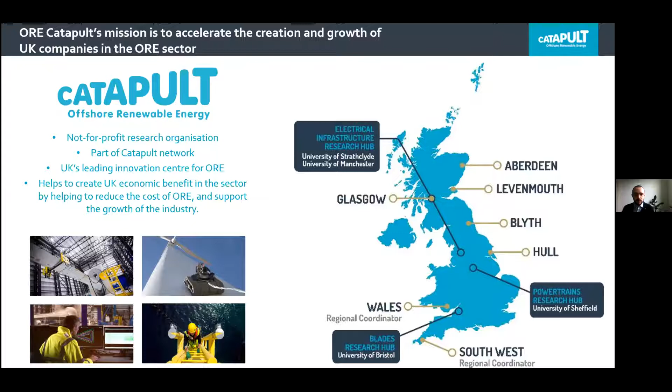So just a quick introduction to ORE Catapult. We are a not-for-profit research organization. We are part of the Catapult network, mostly located in Glasgow and Blyth, where we have our testing facilities. But at the moment we have numerous regional offices, including Southwest, Wales, Aberdeen, Hull, and East of England. We are there to help create UK economic benefit in this sector by helping to reduce the cost of offshore renewables and support the growth of the industry.

I guess a good starting point is a point on net zero. We, as UK, are legally obliged to reach net zero emissions by 2050, which is in less than 30 years. This means that all major emitting sectors, including travel, heating, manufacturing, power generation, and farming practices, will need to change radically during the next 30 years. Even with robust efficiency improvements, our electricity use will double or even quadruple. This will require major new policy reforms to drive both the supply and demand of low, zero, and negative carbon technologies. We may observe the installed capacity of offshore wind jumping from 12 gigawatts to 75 or even 100.

Hydrogen production, which at the moment is mostly from fossil fuels, will jump from around 27 to 370 terawatt hours. We'll need to decarbonize all of our transport and freight. The number of zero carbon cars will jump from 250,000 to 35 million. And it will also require some lifestyle changes, like changes to diet, where we'll need to cut our beef, lamb, and dairy consumption.

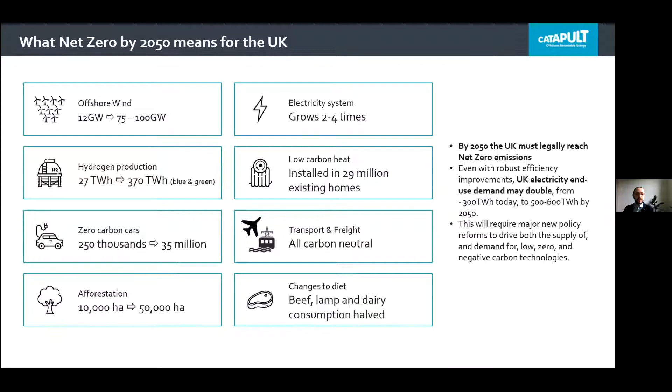There are key integration challenges to such a system, starting from the grid and grid design and flexibility. We have balancing for short time frames, which includes integrating variable energy sources into the electricity grid, which will probably be supported by demand response, utility scale batteries, and vehicle to grid. Balancing for long time frames, like interseasonal balancing, and decarbonization of heating, cargo transport, and the maritime sector. This will require some policy mandates and frameworks, like level of interconnection, role of hydrogen in energy trading, hydrogen safety regulations, and offshore wind deployment regulations.

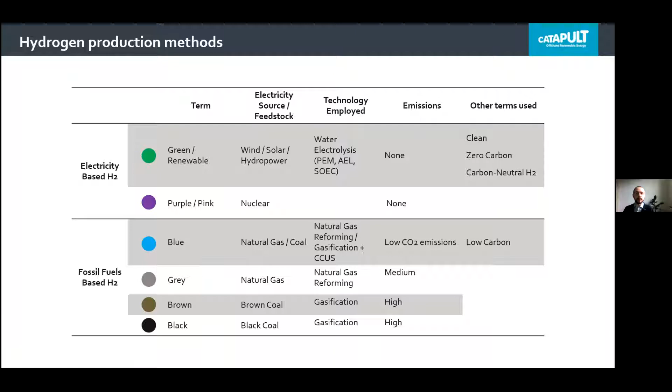Because hydrogen is considered such an important part of the energy system, we took a study together with the Offshore Wind Industry Council and delivered a report on offshore wind and hydrogen, solving the integration challenge. It's available publicly on ORE Catapult's website.

I think we released it in September, which makes it, at the time when we're writing, almost a year old. And in the hydrogen space, a year-old report is already quite old, because some of the findings might have been updated. Nevertheless, most of them are still in place. I'd like to present you some of the key findings from this report.

Starting from the energy system, we will require around 130 to 200 terawatt hours of hydrogen in 2050 in order to integrate 75 gigawatts of offshore wind or more. Second, and probably the most interesting, is that green hydrogen from offshore wind costs less than blue hydrogen by 2050. And with accelerated deployment, this cost can drop even further by 2030.

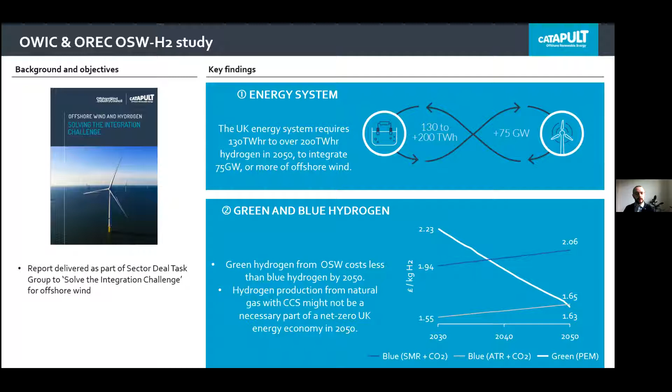This means that hydrogen production from natural gas with carbon capture and storage might not be a necessary part of a net zero UK energy economy in 2050. The cost reduction will be quite similar to what we've managed to achieve in offshore wind. So technology acceleration will be an essential means of reducing this cost.

We have a strong leadership in academia and the industry to build on. And the good part is that we've already done that before with offshore wind, so we can apply these lessons to just another sector. There are plenty of potential benefits. It's not only the UK that's looking into hydrogen. It's been a hot topic for the whole world.

We've tried to calculate these benefits, and we can have a cumulative GVA in 2050 of 320 billion, of which 250 is in exports. We can create and sustain 120,000 jobs. And there is an additional potential in green hydrogen exports to Europe, using up to 240 gigawatts of dedicated offshore wind.

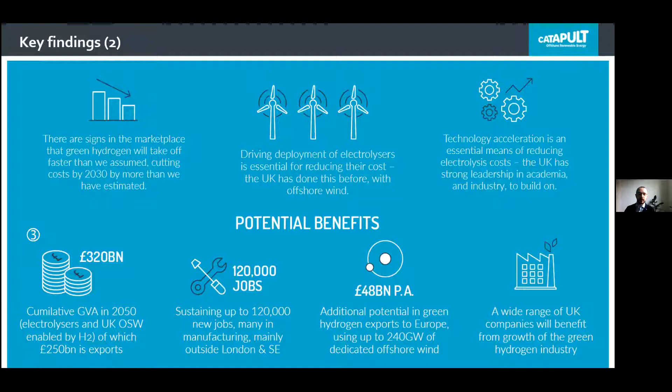Building a bit more into the cost reduction, modern PEM electrolyzers are a new industry with a significant scope for cost reduction. The research started in around the 70s, and the first commercial product at more than 1 megawatt scale was released in 2015. Until very recently, every unit was hand-built.

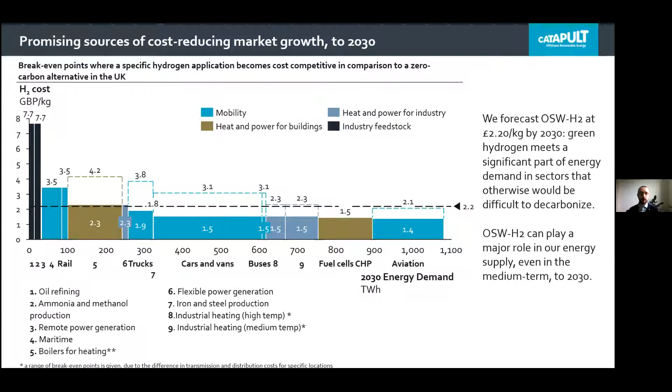So we're not talking about a technology that will be necessary in 20, 30 years. We really need to start now. That's why we've developed a roadmap with recommendations to the government. It has 3 essential tracks. The first is an R&D program, which, in particular the elements related to the cell stack component, will draw upon our world-leading capabilities that already exist within UK academia.

The second track is a track of demonstrations at scale, including demonstration projects in production, in mobility, in the gas network, and industry, and the set of enabling actions and policies, which make up track 3.

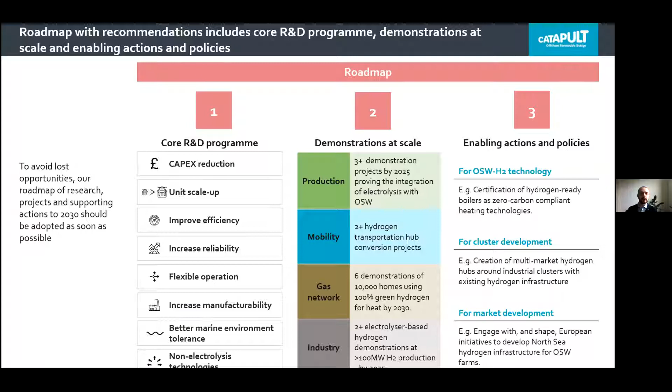As I've mentioned before, the UK is not the only country looking into hydrogen. Several other countries announced their strategies over the past 3 years, including the EU last year. We know that there are some in preparation, including ours, and hopefully the hydrogen strategy for the UK will be published in the first half of this year.

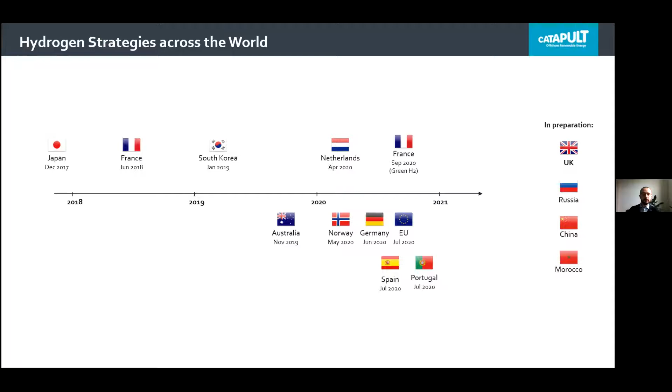So to leave you with a bit of thinking, I've tried to compile some of the questions on hydrogen, starting with what's the role of hydrogen in the UK? How much do we need it and at which point? Where should it be used? There are so many applications, but will we really need it for personal cars, for example? How much carbon could we save? What are the energy system implications? At which specific points can the UK take a global leadership position? And what existing assets can we leverage?

Obviously, in order to achieve that, we need to figure out what we need to do now. What are the barriers? How do we reduce the cost? What is the role of the government? How do we encourage coordination across sectors, particularly in regions that have a focus on oil and gas? How do we ensure we have the right skills, and what infrastructure will we need?

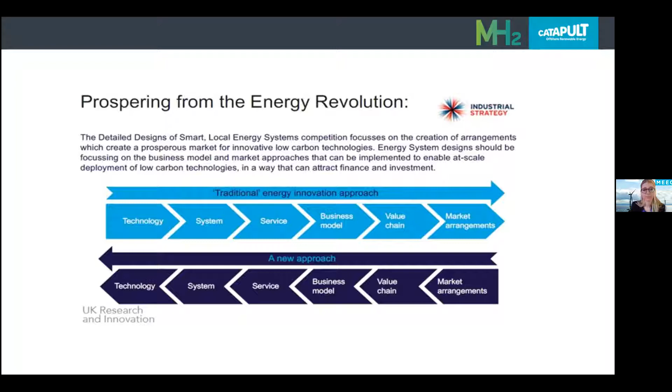So why did we pick the Milford Haven waterway? The Port of Milford Haven is a leading UK port handling over 30 million tonnes of cargo annually. It is also known as the UK's largest energy port and is capable of delivering 30% of the UK's natural gas demand. It has also got 17-metre depth of water available at all states of the tide and the ability to handle vessels with drafts up to 22 metres. It also has proximity to the Atlantic trade routes and a high capacity for gas and oil pipelines and electricity connections to the centre of the UK.

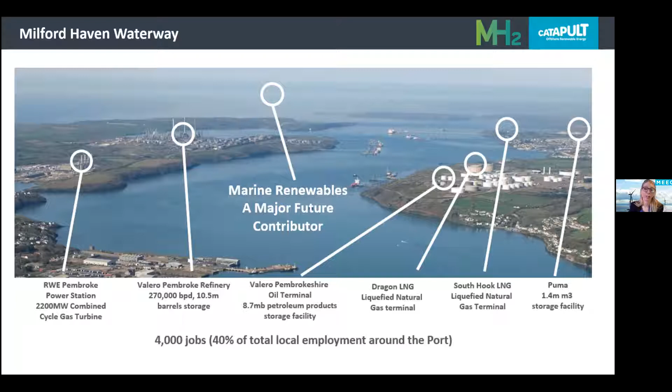The project has 5 main partners, so Pembrokeshire County Council as the lead partner, the Port of Milford Haven, Riversimple, Wales and West Utilities and ourselves. We're being supported by Arup and Energy Systems Catapult as subcontractors, and then we have various non-funded collaborators and supporters.

A national transition from natural gas to hydrogen is increasingly seen as a likely component of full decarbonisation by 2050. When the Energy Kingdom project was written, we wrote the objective as to establish seed markets for the use of hydrogen around the Milford Haven waterway by integrating a wide range of major energy facilities, renewable energy generators and energy consumers in the community, using a systems architecture that can be implemented with commercial ready solutions and which focuses on underlying fundamentals and is therefore robust in the face of regulatory change.

Our ambition for the project is to gather a detailed insight to the whole energy system around the Milford Haven area. We want to identify and design a future smart local energy system based on a truly multi-vector approach and a comprehensive energy systems architecture.

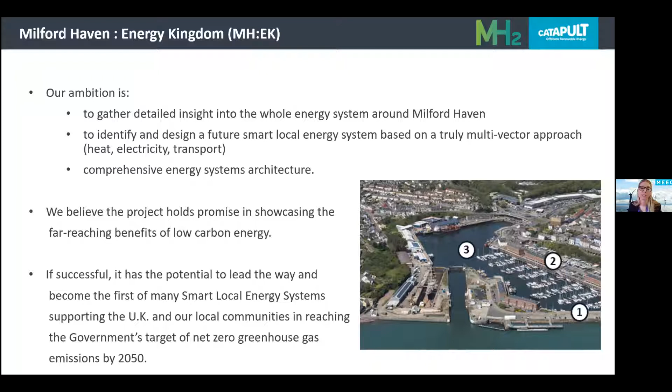We believe this exciting project holds promise in showcasing the far-reaching benefits of low-carbon energy. If successful, it has potential to lead the way and become the first of many smart local energy systems supporting the UK and our local communities in reaching the government's targets of net zero greenhouse gas emissions by 2050.

In the project, we have 11 work packages. Energy Systems Catapult are developing our systems architecture design. Arup is currently working on understanding the interplay of the local energy assets in the Milford Haven area, engaging with a range of local stakeholders as part of this exercise, both to introduce the Milford Haven Energy Kingdom project and to begin to draw on information required to support the project.

Pembrokeshire County Council and Riversimple are developing the hydrogen transport demonstrator. The Port of Milford Haven and Wales and West Utilities are developing the hybrid heating trial. We also are looking at finance and investment. So we're concentrating on engaging investors and demonstrating an economic and sustainable investment case for the decarbonised multi-vector energy system.

We're going to be doing lots of stakeholder engagement. We're going to engage with stakeholders and explain potential environmental, economic, well-being, energy security and particular benefits for the decarbonised multi-vector energy system. The stakeholder engagement will draw strongly on the vehicle and hydrogen heating demonstrators, which will support awareness raising and education by demonstrating how hydrogen can be integrated into the local Milford Haven area. I'm just going to quickly show you a short video about the project.

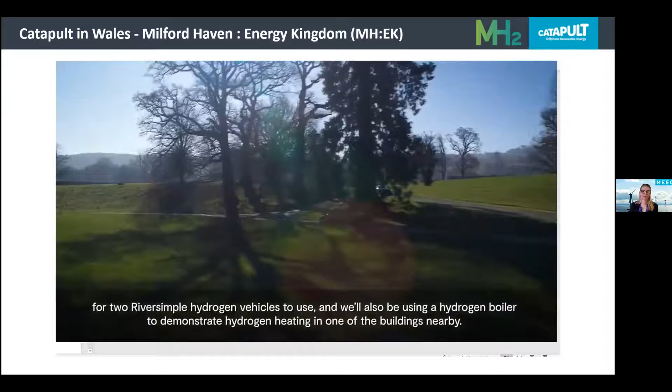The project's taken steps to prove that hydrogen has a place here in the UK's largest energy port. That's important because it ensures growth, prosperity, keeping jobs and industry alive here, and making most of the transferable skills from a successful existing energy sector. In order to make sure we have the data that we need for our design, we're really pleased to be hosting a few demonstrators, which includes just behind me on the quay an electrolyser producing green hydrogen from local electricity for 2 Riversimple hydrogen vehicles to use. And we'll also be using a hydrogen boiler to demonstrate hydrogen heating in one of the buildings nearby.

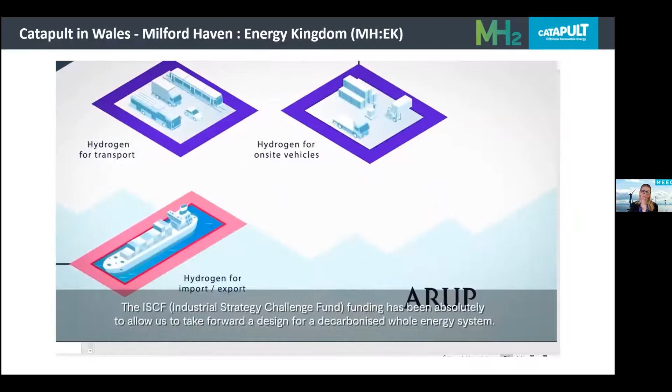The project has the potential to become the first of many smart local energy systems and seeks to make a strong business case for investment in hydrogen to the government and engage key stakeholders in the waterway. The ISCF funding has been absolutely critical to allow us to take forward a design for a decarbonised whole energy system. Ultimately, our project aims to benefit the wider South Wales region and the UK's national net zero aspirations.

So as the video showed, we're proposing to site our hydrogen refueler demonstration on Mackerel Quay in Milford Haven. We will be electrolysing green hydrogen on site from the Port of Milford Haven's Smart Local Energy Cluster. If everything goes to plan, the refueler and cars should be in place by the end of May 2021. That's a bit delayed. We were hoping to have them by the end of March, but due to COVID, it's just taking that little bit longer.

So we're going to have 2 Riversimple Rasa cars, which will predominantly be shared between Pembrokeshire County Council, the NHS and the Port of Milford Haven. In the first instance, these cars are going to be allocated to particular people for a month. For example, community nurses, fleet managers, maintenance teams. The idea of this is that the month before they have the Rasa car, we're going to put a monitoring device on the car that they normally use. We can then measure their driving styles, the routes they take, other relevant information to learn all about them and what they do with their vehicle.

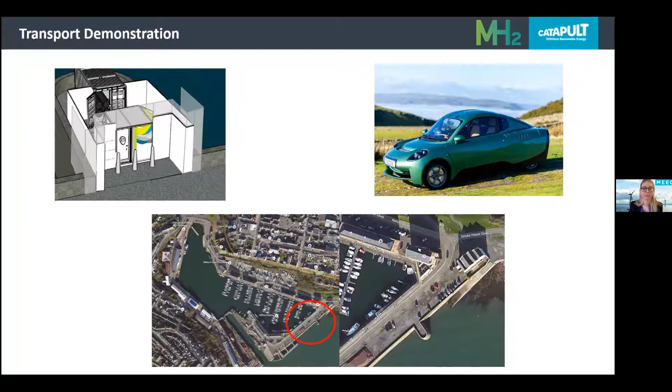We're also having a demonstrator hybrid heat pump and a hydrogen ready boiler in one of Port of Milford Haven's buildings. The building we've chosen is a commercial building, but it's the same size as a domestic bungalow. So it'll help us gain vital feedback to compare the data with existing conventional boilers. These trials are really important as they will allow people to test real-world hydrogen vehicles and heating equipment, and the data from both these trials are going to feed into our final reports.

Some of the reports that we're going to be having after this project will be designing an underlying systems architecture for a trading platform, infrastructure outline drawings, generation model and hydrogen production model. We're looking for a detailed design for hydrogen ready heating systems, a design outline drawing for transport solutions, and also a budget for the complete local energy system.

The Milford Haven Energy Kingdom project intends to provide a detailed design blueprint for an investable local hydrogen-based energy system on the Milford Haven waterway that will allow for the integration of heat, power and transport. We want to establish a roadmap from the Energy Kingdom perspective of policy change necessary to support the energy system that incorporates hydrogen. We believe that this project will bring many benefits locally through the safeguarding of energy sector jobs in the area where there's a high import of natural gas as we transition towards the low carbon society.

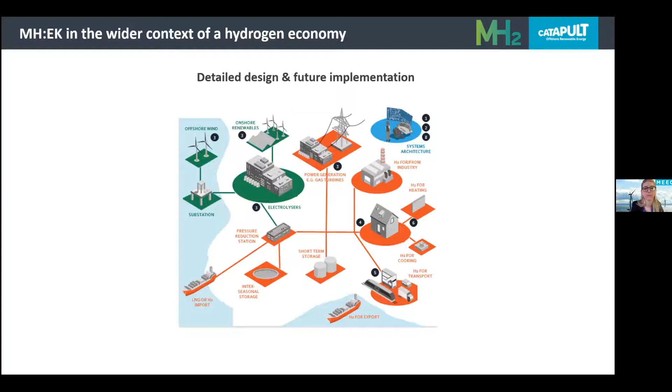I'm just going to give you a quick introduction now to the MEECE project I work on. So that's the Marine Energy Engineering Centre of Excellence. This is based in Wales and it was developed to carry out research and development projects with companies in the West Wales and the Valleys region predominantly. Our aim is to support innovation in the marine energy sector, but not exclusively. So we can work with companies to support designing of products and components, building, testing, verification and validation.

Our natural target is the marine energy supply chain companies and developers, but we're also looking to work with people in aquaculture, hydrogen and any other product or service that would benefit from being demonstrated in the Milford Haven waterway. So if you're not based in Wales or in West Wales and the Valleys, we can work with you as long as we can prove that there's a benefit of your device being tested in the Milford Haven area. So if you do have any product ideas or products that could benefit from further research or testing, please get in touch.

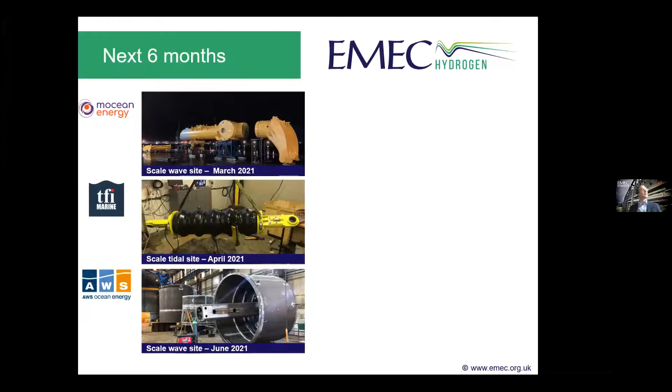So just briefly, what we're up to over the next 6 months or so, we've got a few technologies. There wasn't a lot of activity on sites last year due to COVID. And I think what we found is everything is kind of moving to the right into the first half of this year. So we've got 2 wave energy technologies, Mocean and AWS, who will be coming on site in March and June this year. We're also testing a floating wind mooring system, which is being developed by TFI Marine.

And then towards the middle of the summer, or the start of the summer, we'll have Orbital and Magallanes, 2 floating tidal energy technology developers, coming on site and connecting at our Fall of Warness test site. And then lastly, to cap off a busy 6 months, we're installing a 1.8 megawatt hour flow cell battery with Invinity on our tidal energy test site.

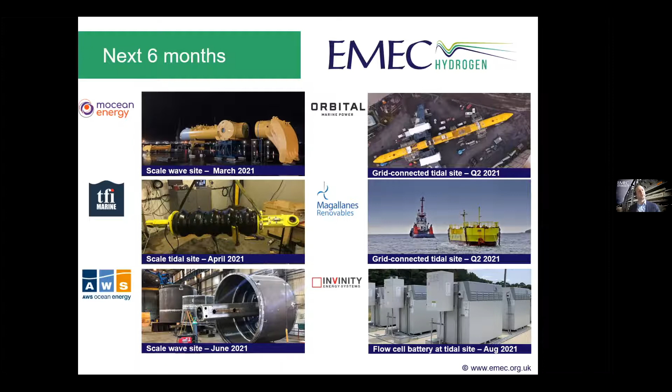Okay, so then on to the hydrogen bit. So we started looking at this in about 2014, and due to the quite unique situation in Orkney, Orkney produces about 130% of its electricity requirements from renewables each year. So there's a question as to what you do with that extra electricity. And quite a bit of the time, because of the active network management system that operates in Orkney, wind generators in particular are being curtailed, and when they're being told to turn off by the network operator, they're not making any money.

So that's an issue. It's also an issue on our tidal site, where we only have 4 megawatts of export capacity. So when we want to generate more than that 4 megawatts, we wanted to have some kind of an outlet for doing that. So in 2014, we started looking at a lot of different solutions. Further graph here as well, just highlighting the disparity in electricity production and demand on Orkney. So as you can see, quite a lot of renewable energy on the grid. So we started looking essentially at what we can do with this spare capacity rather than just turning off wind turbines or tidal turbines, as the case may be.

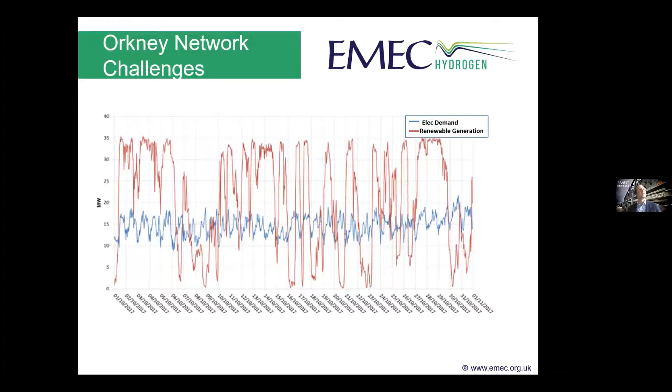And this took us down the route of looking at hydrogen in about 2015, and subsequently we built out a number of projects. These are the base projects that we started off at EMEC on the production of hydrogen. I don't know if you can see my cursor, but starting up on the top left-hand side of this map here on the island of Eday, this is where our tidal energy site is. So we have tidal turbines feeding electricity into the substation here. We also have a partnership with a community-owned wind turbine, which is experiencing very high curtailment rates. So we're taking electrons from the wind turbine and also from the tidal turbines and generating hydrogen using a 500 kilowatt ITM electrolyzer on site here.

So producing hydrogen, then that gets compressed and stored at our substation and shipped via ferry back to the mainland, where we have a 75 kilowatt fuel cell, which is powering the auxiliary systems on ships while they're docked in harbour here. We also have a hydrogen refueling station as well, which refuels a fleet of vans owned by the local council. In parallel, there's also a 1 megawatt electrolyzer on this island here of Shapinsay, which is also generating hydrogen from a curtailed wind turbine and shipping the hydrogen back to shore.

The long-term goal really where we want to get with this is around powering the ferries and maritime transport on Orkney. We kind of had to break this up into different parts. And with all of the moving around of hydrogen in this way, it's not a commercially competitive concept at present, but as a research center, it gives us the opportunity to break up the challenge into different bits around how you regulate the transport of hydrogen, the handling of the gas, and lots of interesting stuff that we've had the opportunity to get into.

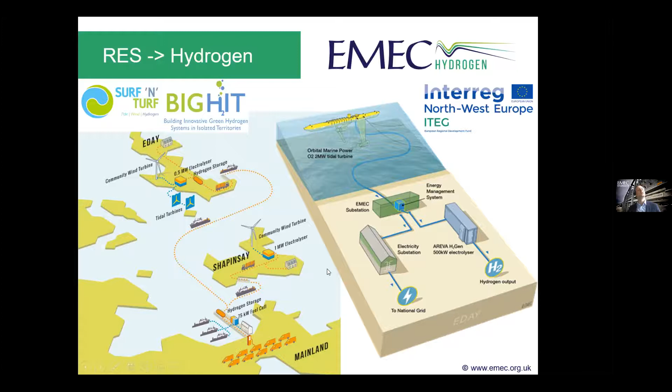The next project then on the generation side is on the right-hand side of this picture here, where we're working with Orbital Marine Power and our partners at Areva, who were recently acquired by GTT and have changed their name to Elogen, I think. So they'll be putting a second electrolyzer on site into this system at Eday later this year. So that's on the generation side and where we got to. And just to go into that in a little bit more detail, the system that's emerging here on the hydrogen side.

Okay, so I guess then you come to the point where we've made hydrogen and there's opportunities to do something with that hydrogen. As a research center, this is a really nice place to be in. We've kind of come down this route where we've had a challenge in front of us and we've tackled it, but then that opens up other opportunities as well.

So taking a look at this is an audit of what energy is used in Orkney, and considering that the electricity piece is kind of looking after itself, and as we've seen from Casper's slides as well, the proliferation of offshore wind across the UK, it's really going to mean that we're going to have quite a low carbon per kilowatt in the future. So given that that's largely to look after itself, then what can we do with the hydrogen to decarbonize other aspects of the economy?

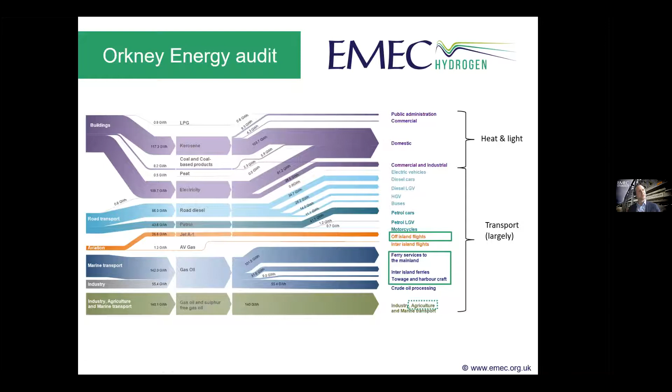We've done quite a bit of work, I'll get to that in a second, around how you produce hydrogen on site, store it, but then the handling of the gas and also the dispensing of the gas, and a lot in how the refueling technologies work in particular. And then also looking at developing hydrogen use cases to support other decarbonizing activities. So, as I mentioned, the transport aspect is really where we're zeroing in, and in particular on the maritime transport aspect and aviation.

We've learned a lot, particularly in the maritime space, running into, as you would in new sectors, difficulties around regulation and standards essentially not being fit for purpose because no one's done it before. And that's really, as a research organization, a nice position for us to be in, to be the front ones that are tackling that challenge.

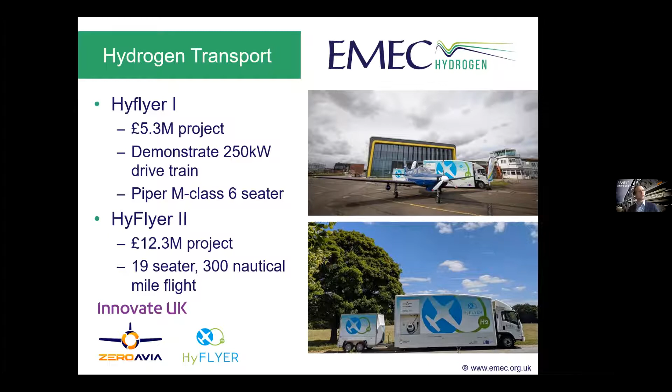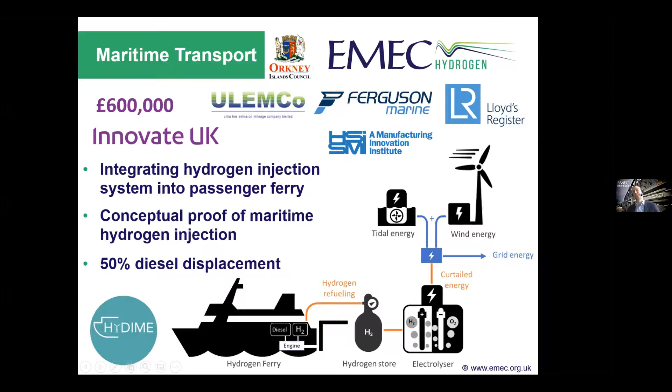We also have another maritime project, which is called HySeas 3, which is looking at a fully hydrogen electric drivetrain for a ferry as well in Orkney. And then moving on to using hydrogen for combined heat and power as well. This is a project that was announced recently, funded by the Scottish Government, where we're acquiring a combined heat and power system from 2G, a Doosan Babcock company, and installing that in Kirkwall Airport in Orkney.

And this will be providing power and heat into Kirkwall Airport, and we'll be providing hydrogen to that project as well. So EMEC taking a leading role, somewhat of an EPC role, I suppose, in managing the design and integration of that system, but then also operating it and providing the hydrogen into it in the longer term.

One other project that we're working on is the HySpirits 2 project. So we were recently awarded some funding from BEIS as part of their green distillery competition to look at how you would decarbonize the distilling process for making whiskey and gin. So phase 1 is a feasibility study. There's us and maybe 10 other companies that have been awarded phase 1 awards, and then 2 or 3 of these will be selected to go forward for demonstration projects this summer. And our partners in that are Edinburgh Napier University, Orkney Distilling and Highland Park.

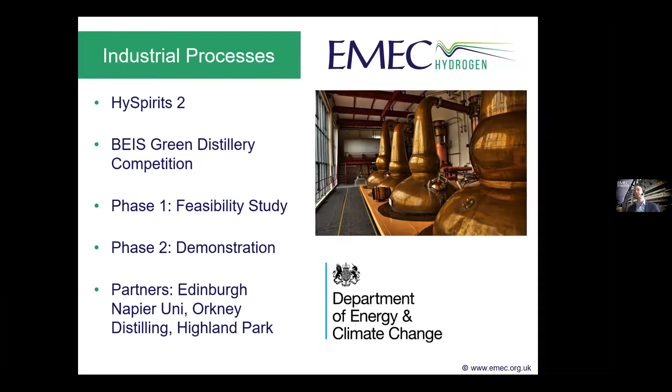Okay, so that's some of the hydrogen projects that we have ongoing at the moment in Orkney. There's a few other bits that I haven't gone into. And really then we've had the opportunity to work with other partners in Europe via a few other projects called Green Hysland, Islander, and the HEAVENN project in the Netherlands. And really these are looking at replicating some of the successes that we've had in Orkney in developing a hydrogen economy and taking that forward.

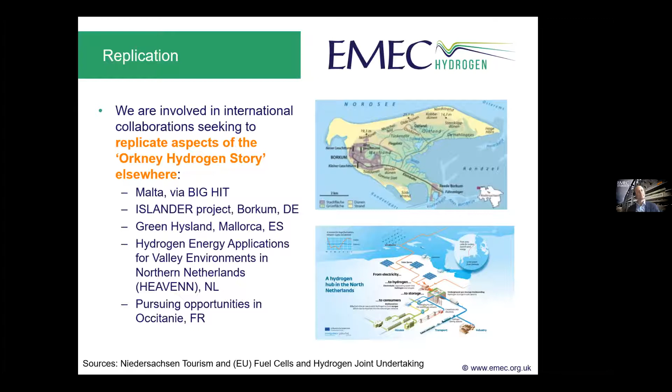Right. And then just lastly to mention, we're also involved in a couple of projects providing techno-economic support around generating hydrogen offshore. We're seeing a lot of interest in this. Our core client base really is power generating technologies. And we've been working with a couple of technology developers to look at this, both from a techno-economic standpoint, but also from the regulatory standpoint and what issues people are likely to encounter. We've also recently been awarded a contract with the Scottish Government to look at offshore wind to hydrogen and the supply chains for that existing in Scotland and in France. So that project's ongoing at the moment.

And where we want to get to then in 2024 is really zeroing in on the maritime decarbonisation aspect. There's also a larger piece ongoing here around the ScotWind leasing rounds and potentially a huge amount of offshore wind to be built out around the Orkney Islands in the coming period, which is really alluding back to some of the really great messaging coming from Caspar and the Catapult earlier.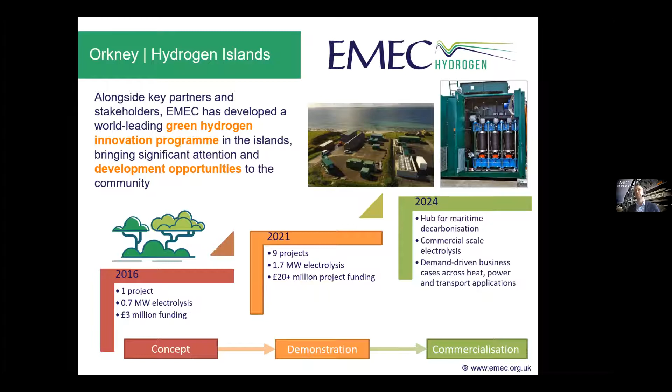And that's the end of my presentation. I was worried I had one more slide because I know we're coming up against the time, but that's back over to you, Simon. Thanks very much, Rob.

That's brilliant. So much going on the island. Do you think there's going to be a name change coming up then? So maybe European Hydrogen Energy Centre? Oh, I was thinking the same thing when the Catapult was talking about the Hydrogen Institute earlier. Yeah, it is something that we've discussed. I guess EMEC's a small organization in a small space, which is marine energy. So it's quite a strong brand there. We did wonder what the hydrogen sector thinks about that name, but I think the conclusion we came to is that it probably largely doesn't matter in the longer term. So. Yeah.

It's a sort of serious question for me. Just looking at Michelle's presentation about Energy Kingdom and what you're doing from an island community perspective and a great business model that you're starting to replicate elsewhere.

Is there a conversation going on between ourselves around Energy Kingdom and what you're doing? Are we starting to compare notes? If we're not, should we? I'm not sure we are, and we absolutely should be. I mean, what we're trying to do in the island context is very different to what would happen in the very large scale context that you would be talking about in the port of Milford Haven with the large gas production or gas facilities that are there.

But there's definitely a similar piece that could emerge in Orkney in the future, particularly with the build out of very large offshore wind projects. So I think there's a lot that we can learn in Orkney from the Haven project, or the project in the port of Milford Haven as well. Okay, great. A couple of questions in the chat. One was about the population of Orkney and that hydrogen service, and whether there's any scale up plans for the future.

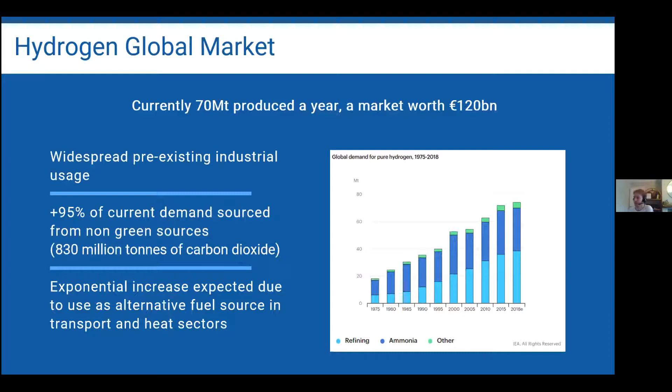And as today is all about, we're now starting to see an exponential increase in alternative uses for this hydrogen, which is only going to push that demand higher and higher in the coming years. So it really wraps up into a ball why we've targeted the hydrogen market with THyPSO. Just to cover a few of the goals. So THyPSO allows us to tackle some of the conventional challenges with tidal energy, which at the moment are high capex and high implementation costs, especially as we're at a smaller scale than wind, and we're at a point where we're doing small arrays or demonstrator projects.

It also offers an opportunity to tackle cross-sector synergistic challenges, helping the uptake of hydrogen, especially in the marine or nearshore sectors. And we believe it offers a lower cost, lower risk, potentially faster route to market for some tidal energy projects, which I'll cover in more detail in a few slides.

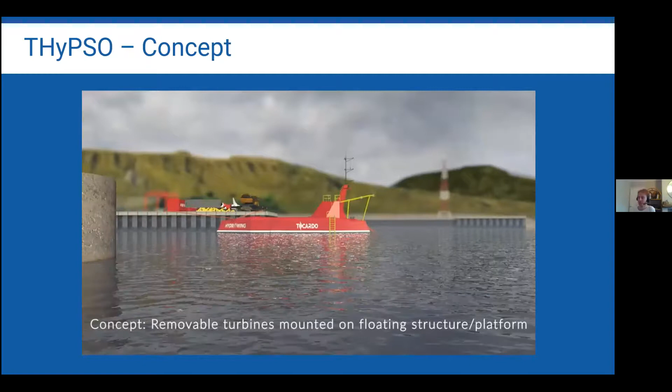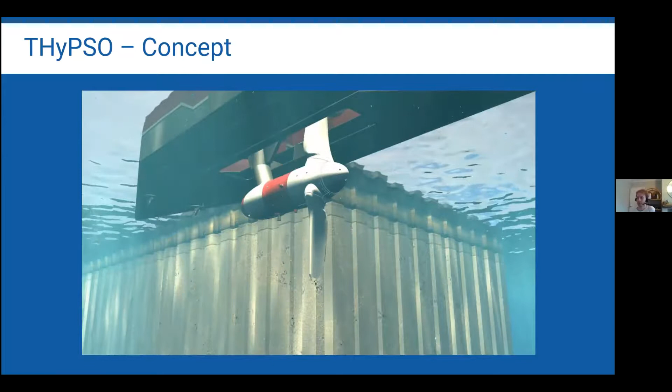I'll just let this play, give a background on what the actual technology is. Hopefully you can see that moving. Essentially what we've got is a vessel which has been optimized for stability and wave penetration. On this vessel we'll then have multiple tidal turbines underslung, and then inside the vessel is hydrogen equipment, your desalination plants and your electrolyzers and storage units.

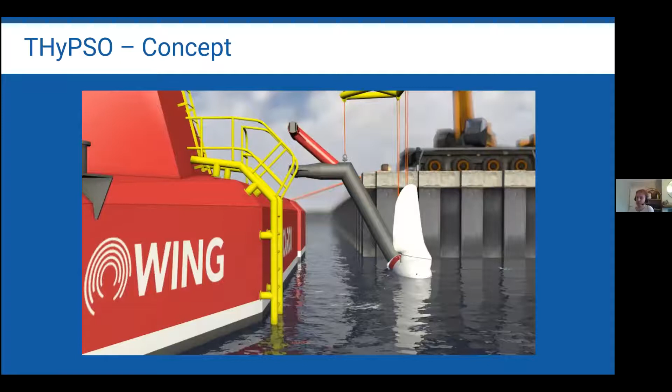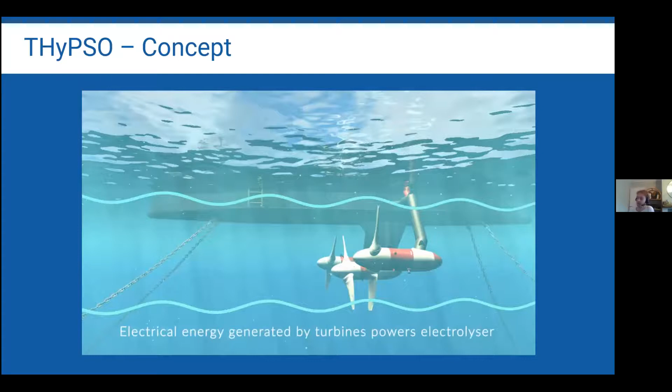The whole concept is that we're creating a platform which is easy to install using low cost equipment in harbors, but also low cost vessels for installation and O&M as well, which are readily available, really trying to drive down that cost of tidal and ultimately hydrogen. The device will be moored on site with just a simple 4-point mooring, and then your turbines just generate electricity as you would in a normal tidal energy project.

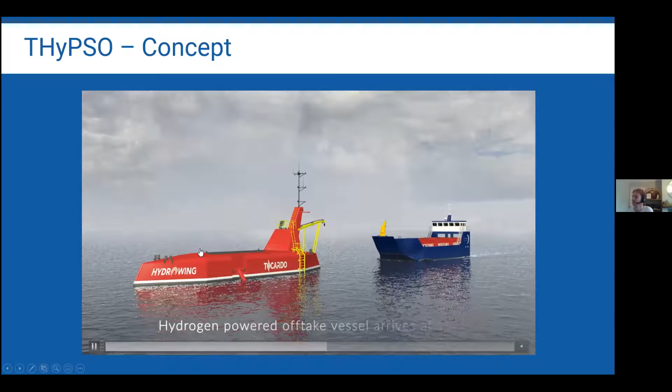But then rather than the electricity being exported through a subsea cable, it's directed into an electrolyzer on board, produces hydrogen, which is compressed and then stored. I'll just let this carry on running. And then when storage builds up, we look to have an offtake vessel come in, and the hydrogen from the production plant will be discharged over onto the offtake vessel.

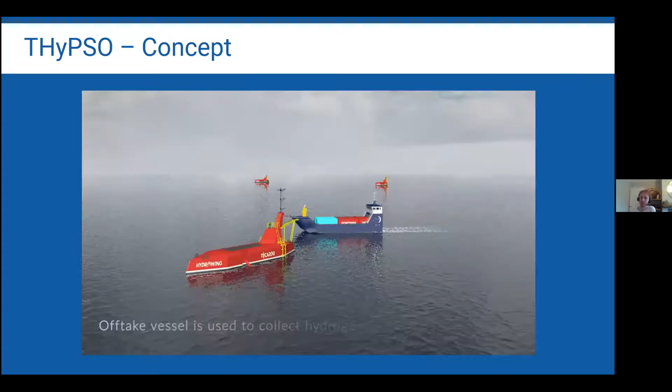This offtake vessel can then service a number of THyPSO devices, and then the hydrogen can be distributed to wherever it's needed on shore. And the beauty of this is that we're disconnected from a single point of delivery. So in theory, these small islands like the Orkney Islands, where there's a number of end users, we can provide hydrogen to all of these smaller end users.

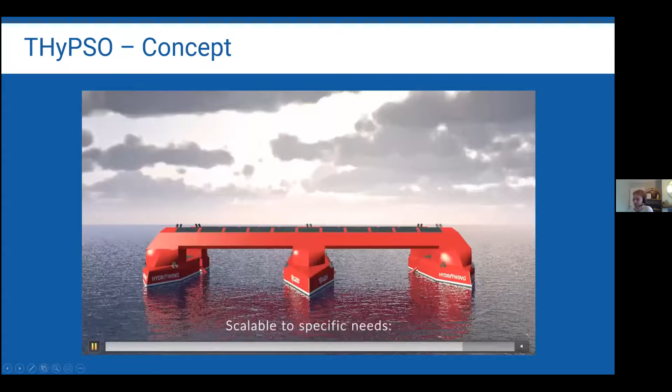And obviously, a key aspect of this is scaling up. So this is just showing how we envision that could be possible. Larger units and the potential to hook in subsea tidal energy devices as well.

Okay, just to cover a few of the advantages of THyPSO, I won't run over all of these, but the major one we see is that we're eliminating subsea infrastructure. So all of your tidal energy projects to date require a subsea cable. By having hydrogen production offshore, we're able to eliminate that. And these cables and the implementation of them account for around 40 to 60% of implementation costs for tidal energy projects where we are at the moment in terms of scale.

It also is a massive point of risk in tidal energy projects and offshore wind. It's a well-known failure risk. So by eliminating all of that structure, we've essentially got a dumb floating vessel, and the risk of failure is massively reduced, which provides certainty as we look to raise investment or finance for implementing these projects.

Another important point, as I've touched on, is that we're autonomous from a grid. So we don't have that cable which is connecting us to a single point of delivery. We can produce hydrogen and distribute it to many end users, which is really quite an important fact, I think, at this point, especially in the hydrogen sector where it stands at the moment, where we don't have these big centralized end users. There's lots of little developing projects which are looking to utilize hydrogen, and THyPSO and maritime distribution offers potential to service and to allow these small projects to spring up and develop.

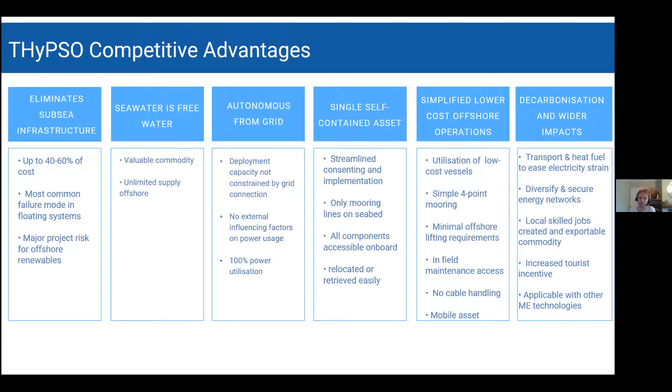So just to run over what we've got in the actual THyPSO, just to make it a bit clearer. So we've got our tidal turbines, as I said. We then look to have the electrolyzer, and a key point of development here is that it would have to be marinized, which is something which we're looking to develop alongside a number of electrolyzer developers at the moment. We then have seawater, which would be our feedstock, and a desalination plant on board, which would provide a freshwater feedstock to the electrolyzer.

Obviously, we would produce hydrogen as the tides go back and forth, and then this would be compressed to 350 or 700 bar, or even potentially liquefy the hydrogen as we look to much larger scales in the future.

And then, yes, a separate vessel which would offtake this and provide it to our end user markets, which I think aligns quite nicely with what's been covered in the previous presentations. We would be looking to target the marine and nearshore sectors. So just four of them, the main sectors: offshore applications.

So in theory, there is potential, as we're seeing the marine sector starting to look to hydrogen as a potential fuel, to have vessels which could directly refuel offshore from these THyPSO-style devices or bunkered hydrogen storage.

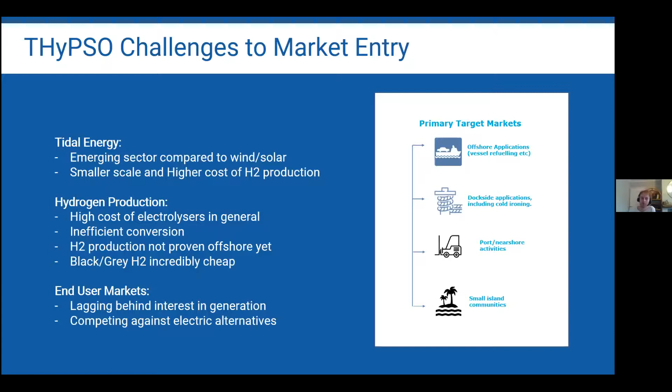And I think a major advantage for an area like the Channel is that it has struggled to implement large-scale offshore wind projects like those seen on the east coast of the UK, whereas tidal is found in regions which are highly dynamic and generally avoided by marine traffic, and they have a much higher public acceptance than these large offshore wind farms. So it offers more of a niche opportunity to harness these renewable resources and provide distributed hydrogen to these areas.

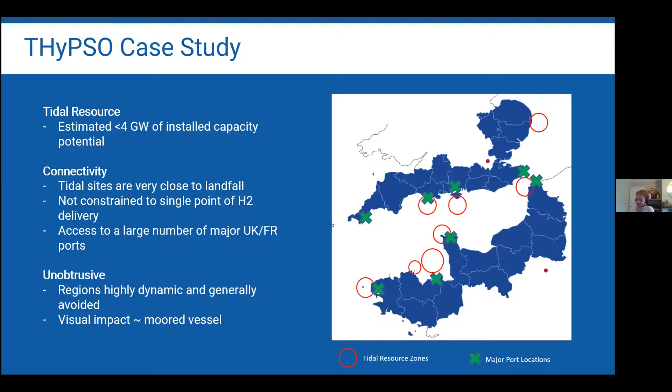Really good stuff there. I think from my point of view, from an engineering perspective, when you look at THyPSO, you think, yeah, actually, it looks like it can do that. It's a straightforward, simple design, and you think, yeah, that's actually quite a good idea. And I suppose that issue around tidal predictability is a really important one. We know exactly when the tides are going to flow, down to the nearest minute almost

in most sites. But from a hydrogen production perspective, putting that cyclic energy into an electrolyzer, how does that work? Do you have to manage that energy and perhaps create some energy storage first so the electrolyzer works efficiently?

Yeah, exactly. I mean, it's all an optimization technique, really. Obviously, the more capacity of electrolyzer you've got, the price tends to go up. So if you can optimize that with storage and you can create a nice flat base load of energy, then you can bring down the cost of that electrolyzer whilst making it more efficient and producing hydrogen at a more constant rate, to really drive down the costs there. And tidal integrates nicely with energy storage to create that nice flat baseload power almost.

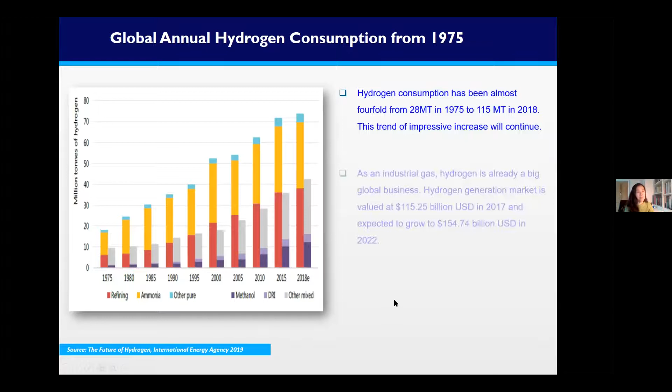The bar to the right represents hydrogen application without purification, for example, for methanol production and for metal refinery application. We can see here the hydrogen consumption has increased fourfold from 28 million tons in 1975 to 115 million tons in 2018, of which 70 million tons is for hydrogen application in pure form, while 45 million tons is for application without purification. We can see the increase is really remarkable, and the trend will continue.

In the financial aspect, the hydrogen market is huge. It was valued at $115 billion in 2017. So this just gives you a general idea about the hydrogen consumption and demand. It's really high.

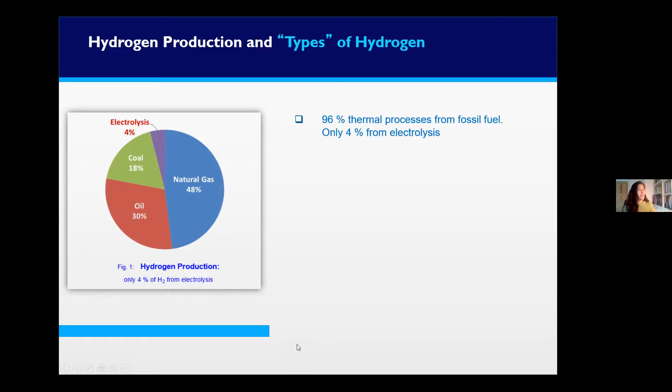Nowadays, as shown in Kaspar's presentation, people talk about hydrogen in different colors. And here, I just show you the pie chart. You can see, basically, we label hydrogen with 3 colors. Black or gray hydrogen refers to hydrogen production from fossil fuel. As shown in this pie chart, 96% of hydrogen currently comes from fossil fuel.

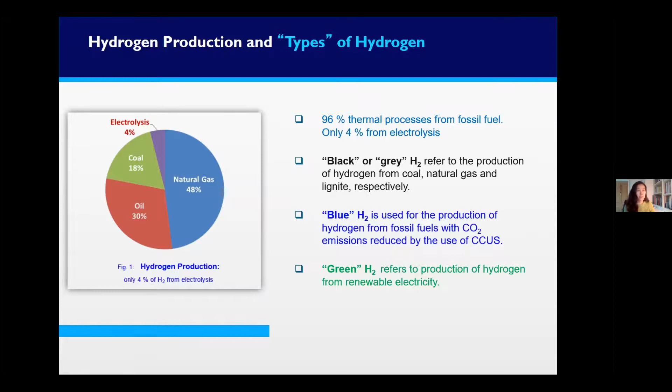Only 4% is from electrolysis. Blue hydrogen refers to hydrogen from fossil fuel in combination with CCUS, which means emitted CO2 can be captured, utilized, and stored. So this is a decarbonized route to achieve net zero. Green hydrogen refers to production of hydrogen from renewable electricity. So this is my topic today.

This slide here, I just give you very brief information about hydrogen from fossil fuel. It's black hydrogen, as we mentioned. The process involves gas phase reaction, typically steam methane reforming, as shown in the equation here. It's high temperature, around 700 up to 1000 degrees. This is very mature technology.

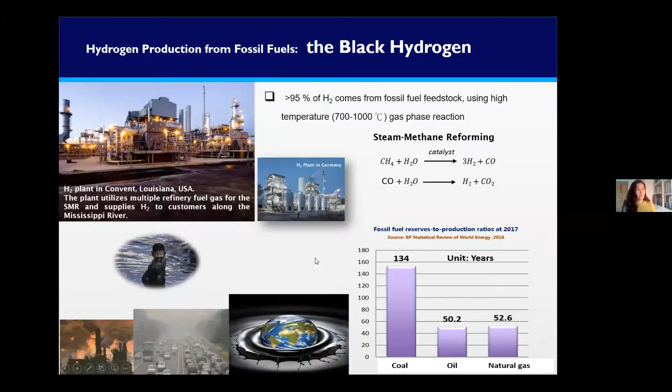However, as shown in this BP data, the fossil fuel reserve to production ratio, we all know fossil fuel one day cannot be sustainable. We cannot rely on fossil fuel. Secondly, there's pollution. So we must take action to move towards blue hydrogen or green hydrogen.

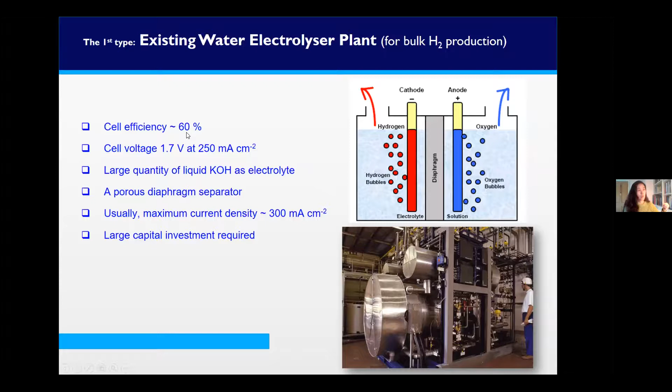Water electrolysis is not a new technology. There are now 3 types. Here I focus on low temperature water electrolyzers. The first type is a traditional water electrolyzer plant for bulk hydrogen production. As shown in the picture here, the cell efficiency typically is 60%. The operating current density is around 250 milliamp per square centimeter, and the system requires a large quantity of liquid KOH as electrolyte. The challenge for this technology is efficiency. You can see it's not high, and the operating current is low.

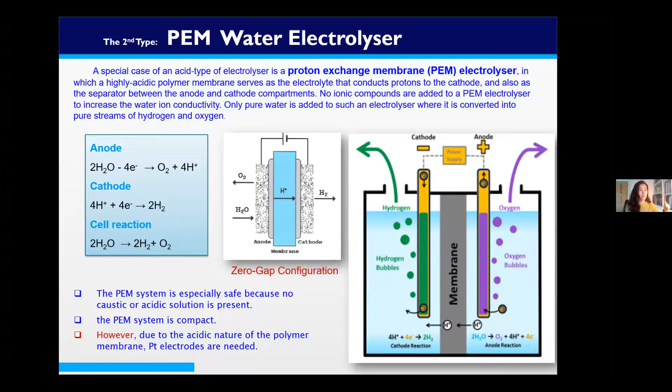In order to overcome this challenge, scientists developed the PEM water electrolyzer. PEM is a zero gap configuration as shown here. In the middle is a proton exchange membrane, not just a separator. This design enables the 2 electrodes to contact the membrane tightly and reduces the system ohmic drop. Also, PEM enables feeding in pure water, so it's less corrosive. However, at the interface between the electrode and the membrane, it's a very acidic environment, which means only precious metals, for example platinum, palladium, or iridium, are stable in such a corrosive environment. So the system requires precious metal as a catalyst, as shown here.

The good news for the PEM electrolyzer is that efficiency is very high, up to 90%, and the system can be operated at very high current density. For example, at 1 amp, the cell voltage is reasonably low, and the system can also handle current as high as 2 amp per square centimeter. As shown in Rob's presentation, ITM Power in Sheffield is the world leading industry in hydrogen production based on PEM water electrolyzers. This slide just shows you some typical projects currently conducted by ITM Power.

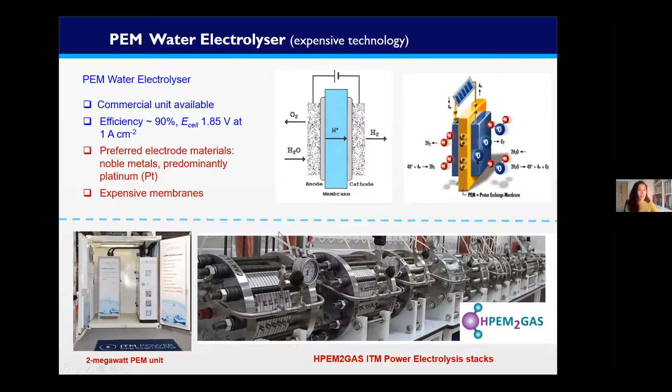Okay, now let's talk about the AEM water electrolyzer, which is the 3rd type and is also my research group's focus. AEM is the anion exchange membrane, which means the membrane will allow hydroxide ions to transport between the 2 electrodes. As we can see, the overall reaction is still water splitting. However, here you can see the cathode is different compared to PEM. Water is fed in on the cathode side and evolves hydrogen and hydroxide ions. The anion exchange membrane allows hydroxide ions to transport through the membrane towards the anode, where oxygen is evolved.

The advantage of this system, firstly, is a zero gap configuration. So the overall system IR drop can be reduced significantly, and the system can be operated at high current. Currently, we can achieve 1 amp and 2 amp per square centimeter. Another advantage is it's cheaper because this is alkaline. We operate in dilute KOH electrolyte solution, it's less corrosive, and the alkaline system enables us to use cheaper metals, for example nickel and iron-based materials, as catalysts. So the overall cost can be reduced with the AEM water electrolyzer.

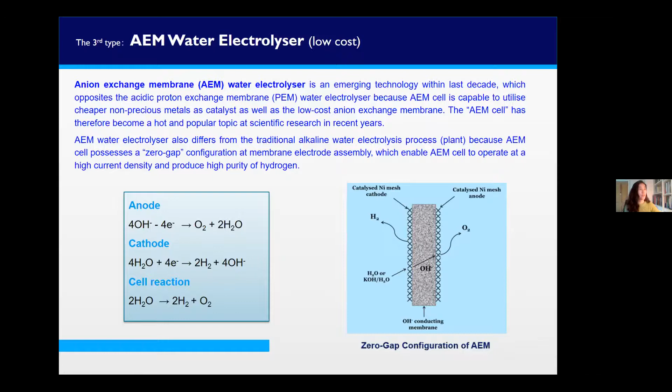This slide gives you an idea about the research currently carried out in my group. This picture is the AEM lab cell on the Penryn campus. This is a 10 centimeter by 10 centimeter electrode area. And we use all of these techniques, equipment, and facilities to carry out the research. And this is Dr. Adeline Loy; she is leading the hydrogen production project in the group.

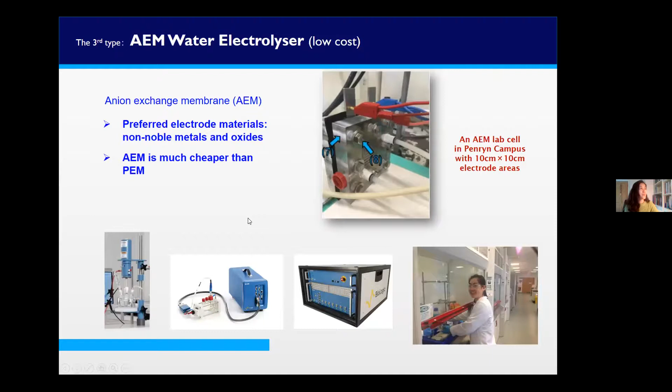Now the research focus in PEM is to reduce the precious metal loading and to develop cheaper membranes, because it is reported for PEM fuel cells that 50% of the stack cost comes from precious metal. The PEM water electrolyzer and fuel cell share a similar MEA structure, membrane electrode assembly, in the heart of the stack. So for the PEM electrolyzer, it is highly likely most cost comes from precious metal. So that is the research focus.

For AEM, the system operates in an alkaline environment, which enables us to use cheaper metals. For example, we use nickel-based binary or ternary oxides or hydroxides as catalysts for oxygen evolution, and nickel metal alloys as catalysts for hydrogen evolution. Currently, the technology is in its early stage of development. In the lab, we can achieve efficiency around 65%. Now the research focus is to develop catalysts and new membranes.

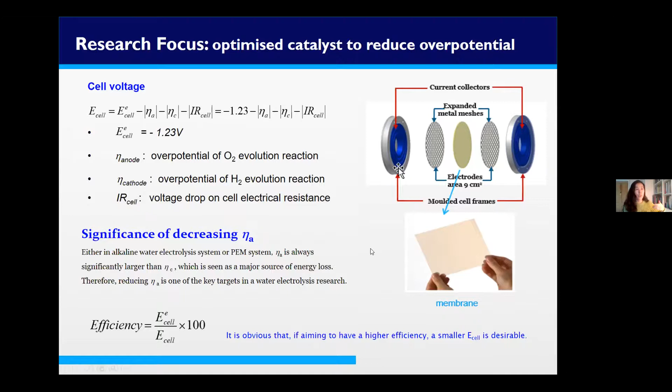According to our research and literature, the overpotential at the anode is always significantly larger than at the cathode. It's around 400 millivolts. So if we do nothing, we could lose 20% efficiency. So it's very important to develop new catalyst materials to reduce the overpotential and increase the system efficiency. I just quickly show you the catalyst development in our group. We use all of the essential techniques to characterize our samples.

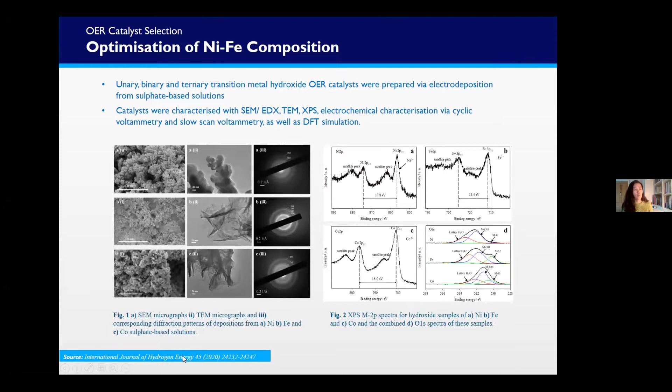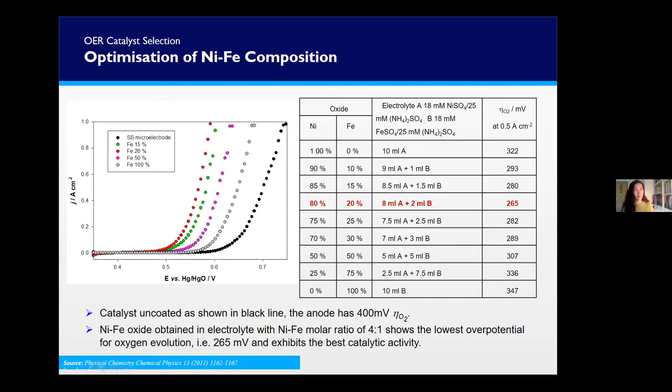If you are interested, you can find more detail in the published paper here. I'll just give you some examples. We select efficient catalysts and then optimize the composition. For example, with this composition, we can reduce the overpotential to 265, which is about a 15% efficiency increase.

We also carry out research to develop catalysts for the cathode for hydrogen evolution. We test sample stability, and we also have equipment and facilities to make the MEA, membrane electrode assembly, which is the heart of the cell, to test material stability and durability.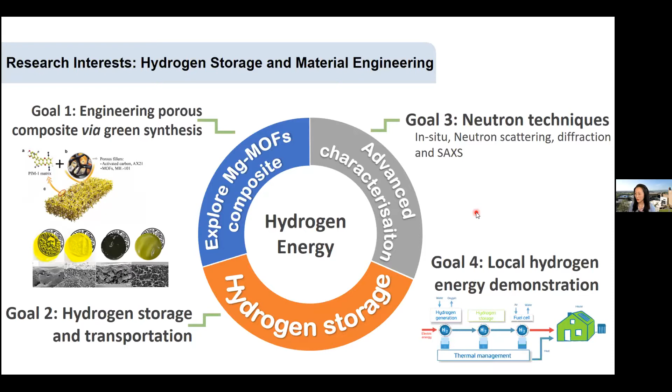So hydrogen has a great potential to be able to store those intermittent and renewable energy resources. So the idea is you take your water and you can split water apart into hydrogen and oxygen, and then you can use hydrogen to power your house, your car, whatever needs energy to drive. And then hydrogen will be converted into water again. So you can see this is almost a green cycle. Water comes in and out.

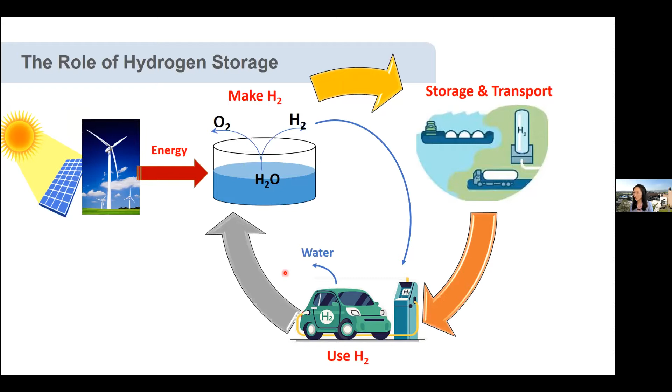So if you look at the gravimetric density, energy per weight, we can see hydrogen is 3 times higher than diesel or petrol, which is fantastic. However, if you look at volumetric density, energy per volume, we can see hydrogen is nearly zero, which means a huge volume of hydrogen gas needs to be used to generate the same amount of energy as diesel or petrol.

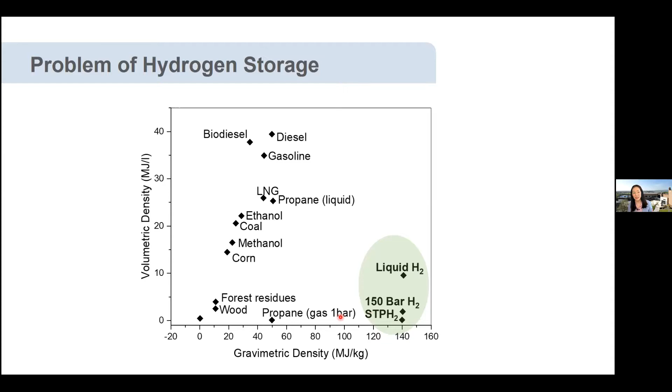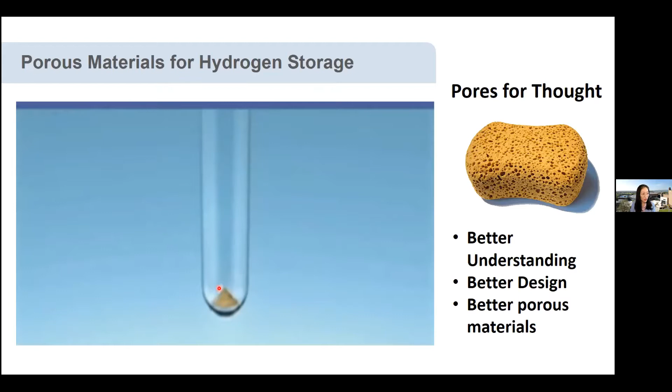So what we want to do is to store hydrogen in porous materials in solid state, which is also called a molecular sponge. As a sponge absorbs water, the molecular sponge can absorb hydrogen. A very special feature of these porous materials is a large surface area and tiny small pores. So as soon as we expose the clean porous surface to gas, it will absorb, compress, and store hydrogen molecules in its tiny spaces to reach an extremely high density, which we wouldn't achieve otherwise.

And so my job is to gain better understanding of how gas molecules interact with the surface, therefore leading to a better design for porous materials. One of the challenges here is how to characterize hydrogen in the porous materials. As I just said, hydrogen is lightweight and it's insensitive to most lab-based techniques, for example, X-ray diffraction. And so it's difficult to see what's going on inside the pores. And the neutron is the best candidate for this job.

A neutron is highly sensitive to hydrogen, and the neutron beam can deeply penetrate everything. That's why it's quite dangerous. So it can penetrate the cryostat, the sample container, the sample itself, and directly probe hydrogen molecules inside of the pores.

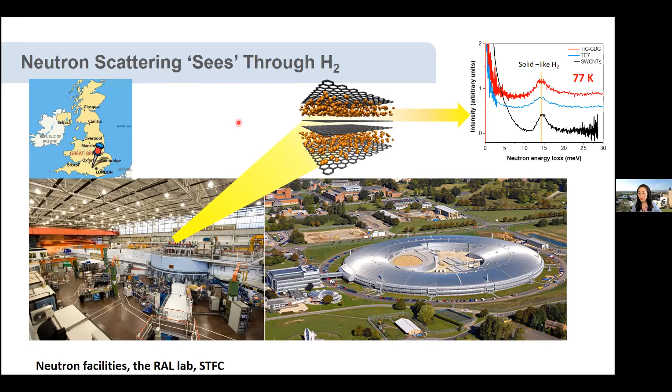However, other porous materials with a smaller pore size, less than 1 nanometer, ideally 0.7 nanometer, all show this solid-like hydrogen peak here. So now we know the pore size plays a key role in this hydrogen densification process. And how about pore shapes?

To answer this question, we selected 3 different types of pore shapes. They are slit pore shapes using these graphitic layers we can see from the microscope, single wall carbon nanotubes representing cylindrical pore shapes, and activated carbon that has a completely disordered structure. And then we identified the optimal pore shape is the slit pore shape with a pore size of 0.7 nanometer.

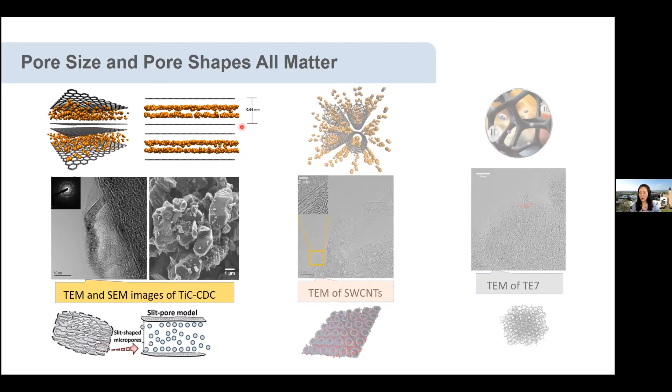We employed molecular simulation to visualize what really happened inside the pores. We can see the golden spheres are hydrogen atoms, and the gray sticks are carbon. In the slit pore shapes, hydrogen molecules form a highly ordered 2-layer structure. The space is just small enough and perfectly suits hydrogen to fit in and fix hydrogen, solidify hydrogen inside its space, so hydrogen molecules cannot move around.

On the other hand, if you look at these cylindrical pores, hydrogen's structure is quite different inside. It's just a 1-layer structure. It has a spherical shape, and it has a certain amount of mobility, which makes it less dense. So we identified the optimal pore size and pore shape for hydrogen densification, for hydrogen storage.

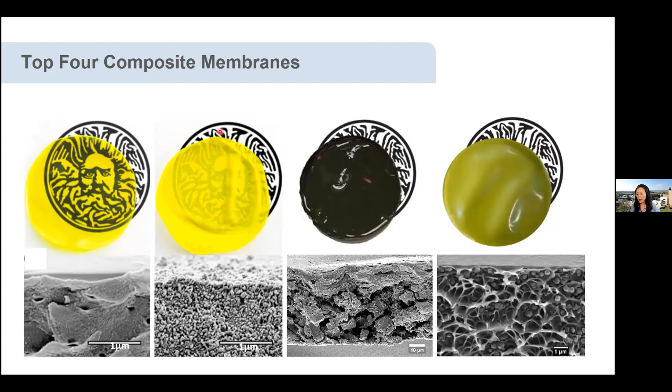Based on this theoretical study, we developed a composite membrane. We incorporate those porous powders with enhanced hydrogen storage activity inside the porous polymer matrix to make a membrane, making it easy to operate. And those are the membranes. The highest hydrogen capacity is around 9 weight% at 120 bar.

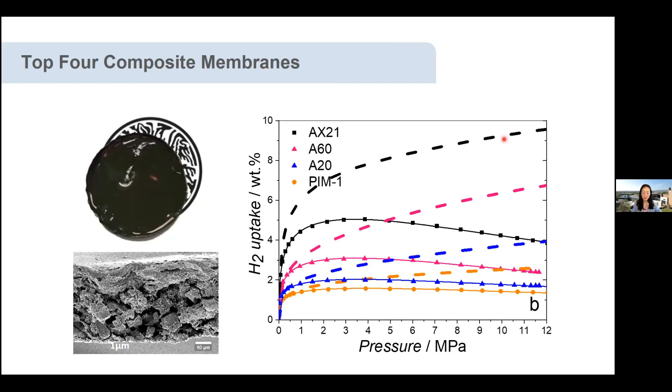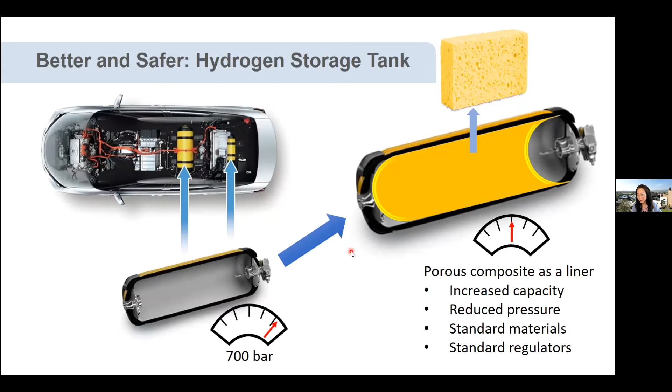Then we applied this composite membrane inside the high pressure hydrogen storage tank as a liner, in order to increase its hydrogen capacity and reduce its pressure. Therefore, we can use more standard materials, standard regulators, making it lighter and cheaper. So that's the quick overview of my project. We are working towards applying our material for energy storage at a national grid level, to offer a green future for our next generation, and hopefully also improve energy security.